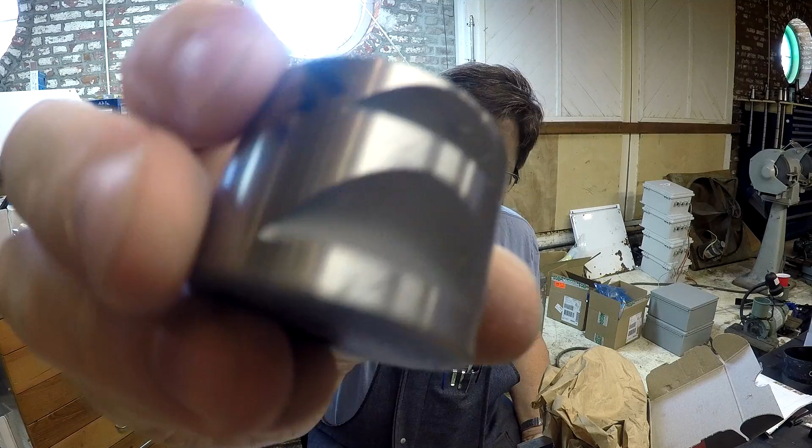If you couldn't tell that by the video, you can certainly tell it by holding an example of his work. He has very nice crisp edges and very nice surface finishes. And then he even sent along the sample piece with the, get zoomed in there. Oh yeah, look at that. And he wrote on here the RPMs and the depth of cuts, so you can use this as a

reference. So I think what I'm going to do is I think I'm going to get my stamping set. I'm going to stamp these numbers in here so that they don't, because they're going to wear off over time. But you want to talk about a nice finish.

So we're going to get to work now on the blocks. Let me change the camera orientation and let us proceed and finish this project up. All right, so here's the drawing of the jaw. Turn it around so you guys can see it. And here you go. Here's the jaw. We've made our nice cut.

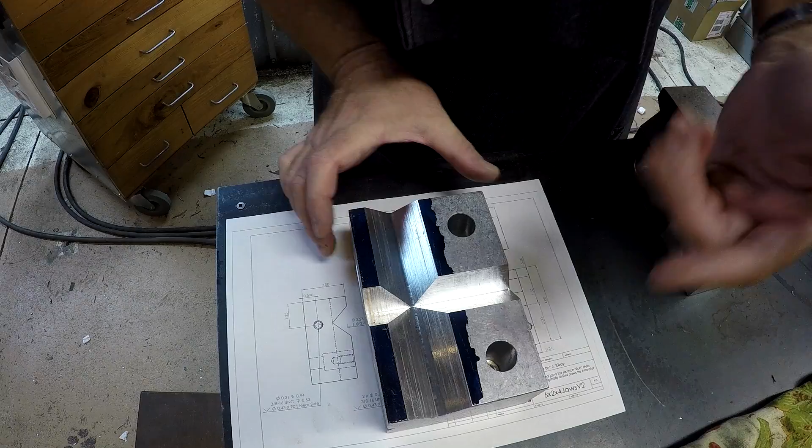Somebody had requested that I get in close so you can see the difference in the surface finish between the horizontal mill cut slot and the shaper cut. As you would expect, it's going to look different because of the difference in the way the tools work. So let's get it in here close and tight. You see the shaper cut slot has these lines in it, but honestly, you can't feel them, right? It's just flat, smooth metal.

This is just because I was manually feeding down. You don't get a real consistent feed when you're manually doing the feed into the work. But it is a nice, smooth finish. And then if you look at the horizontal mill section, you got a very, very nice finish there. And you can see the individual cuts, right, from where the mill was proceeding along.

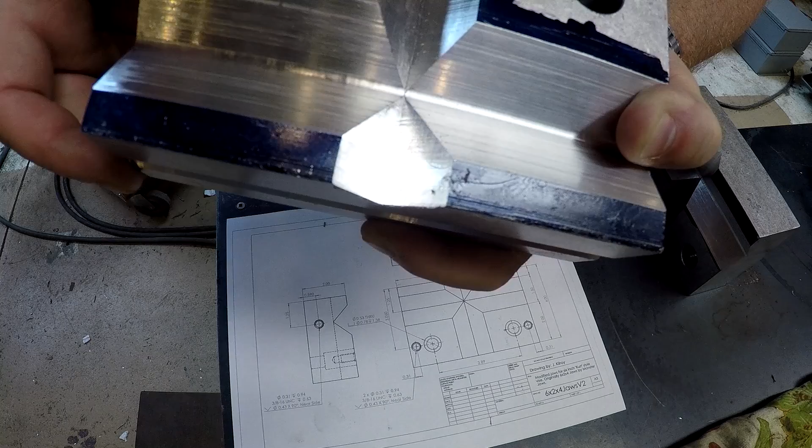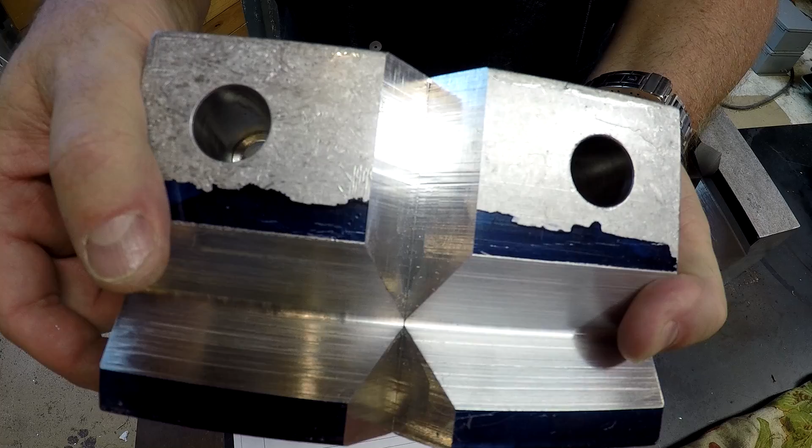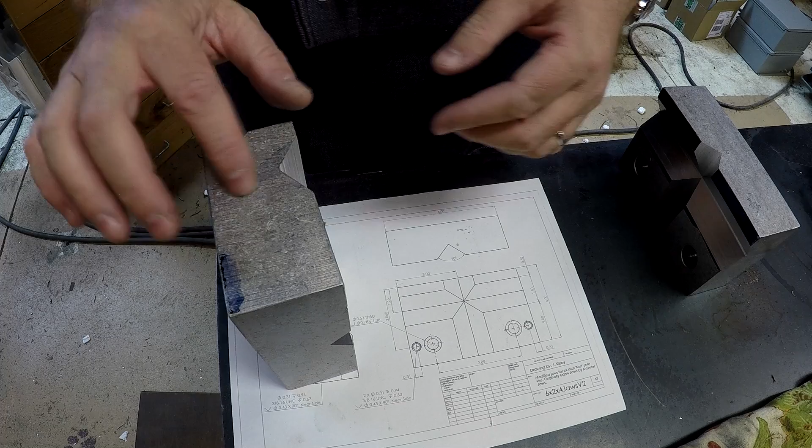There you go. So in both cases, I think we got real good surface finish. That looks really, really nice, so I'm happy with that. What we're going to do now is put the holes in the end here for the stop. This is not what I'm using for the stop, but you get the idea. The Tom Lipton style stop is going to go here. We're going to have to drill and tap a 3/8 by 16 hole here for that.

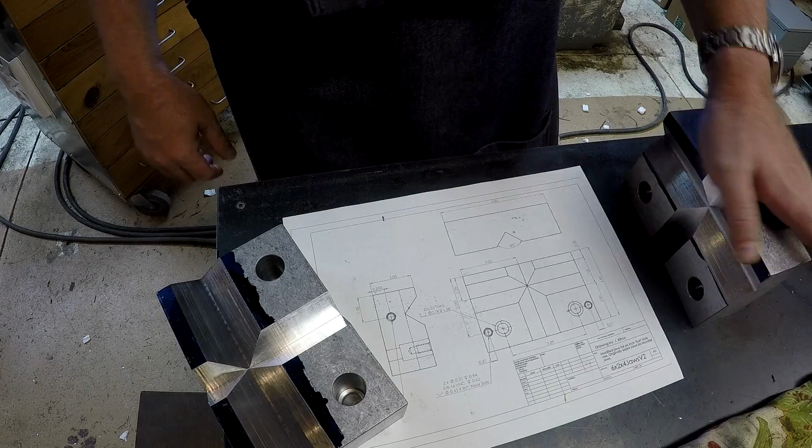And then on the other end, we're going to do the same hole. And then on the front, we're going to have two 3/8 by 16 tapped holes next to the securing bolts that mount this to the vise. These are for what I refer to as the face stops, the use of which has not been divulged yet, but will be shortly. So let's go ahead and get over to the mill. We got two of these. I'm going to do the end stops on both. The face stops are only going to be on one.

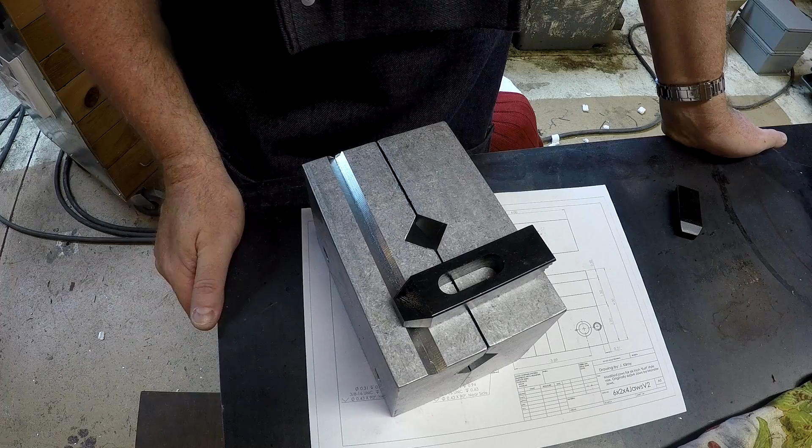And then on this, you remember we added this slot here across the top. I'm going to add some clamp holes here for some hold down hardware. Let me get some of that and show you. So I've got a ton of sets of different types of hold down hardware. And this is the smallest set that I have, and it uses a 5/16 coarse thread, 5/16 hole for the stud.

So since I have a whole set of these step blocks and clamps, I'm going to drill and tap over here so that I can use that 5/16 set to help with work holding, to be able to hold a piece in the top of this small groove. So those holes will go over here. I was thinking I might actually put some right here because I can use a small clamp there, but I can't really set a step block on that. So I think I'll stick with my original plan over here.

So anyway, let's get over to the mill, get this edge, pick our zero up, get this edge, find it in here, and then let's start putting these holes in.

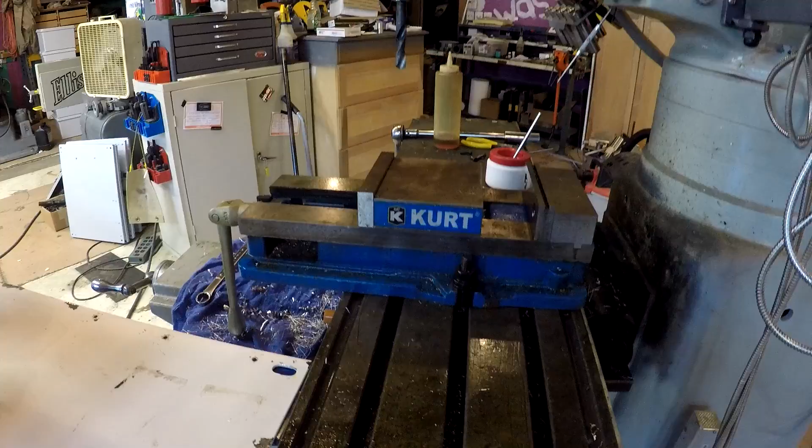All right, before we get started here, I'm getting the mill set up, getting the vise back in position. I'd been using my indexer here, and some people often wonder, how do you handle getting these types of things on and off the mill on a regular basis? And what I have here is a cheap little manual floor jack. It's like a little hand controlled forklift, and it's good for about 300 to 400 pounds.

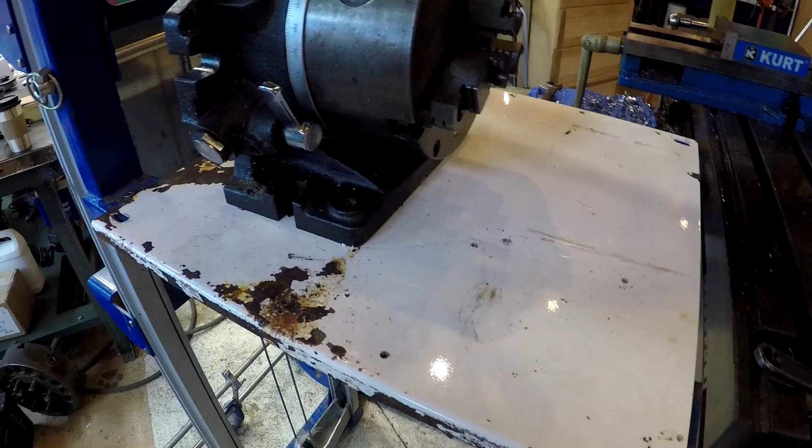And this piece right here is an old beat up back panel out of an electrical enclosure that I had done a while back. Anyway, that's what I do. I pull it up, I get it lined up with the table here, and then I just slide the device over, and there we go. Put it down somewhere where I can get under it with the little forks, and good to go. That allows me to move this kind of heavy stuff around without injuring myself, and do it safely while I'm alone in the shop.

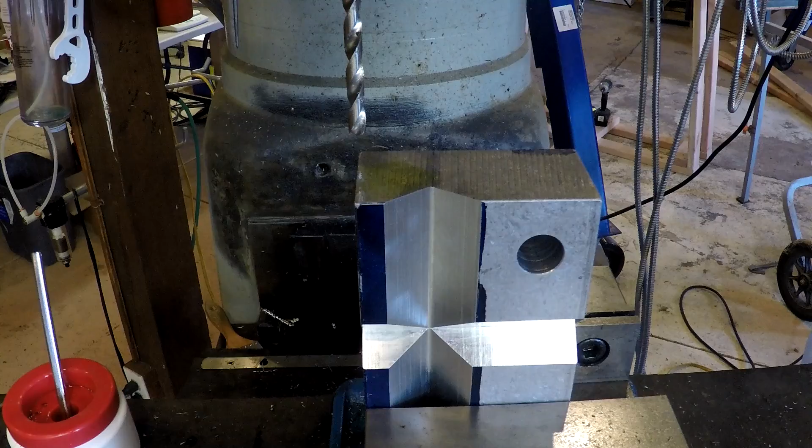All right, here we are in the mill. We've got the jaw chucked up here. I have taken the Ox Tool advice from Tom Lipton, who I understand was shamed into doing this by someone else, and I have this back corner of my fixed jaw right here set as 0, 0 on my absolute. Once the vise is positioned and bolted down to the table, you go ahead and zero that up, and then you can do whatever you want, and you can always get back to that being zero.

So all I did was take a bar here, run it across the 2 vise jaws, and give it a little tap. Tighten it down so that you've got a nice mount right there. So this corner is mounted in relation to that 0, 0 location. So our hole location is 0.590 out and then 1 1/4 down.

So I'm going to change back over to incremental. I'm going to zero my X. I'm going to zero my Y. And then I'm going to go ahead and make my move here. .590, and then 1 1/4 inches. All right, go ahead and snug up an axis or two just to make sure that I don't bump everything.

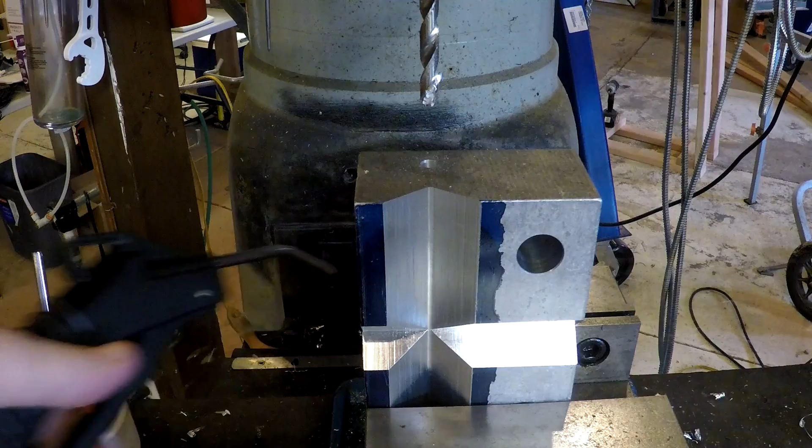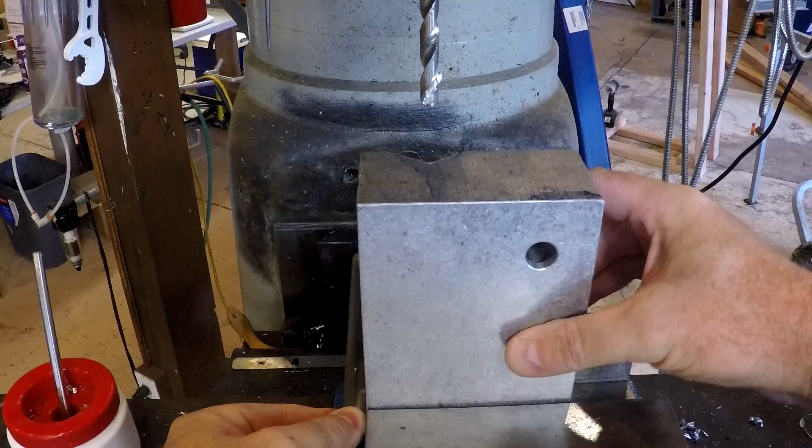Alrighty, when we flip this one over, it's not going to line up any longer, right? I really need to build me one of those little stops for this set of jaws. It's not going to line up with the same location, so we have to offset. So that's easy to do.

So we spaced in 0.590, and what we do is we just subtract 0.590 from 2 inches, which is our total width of part here. That equals 1.41. Undo our lock. So there we are. We're in the same relative position. Now we can drill the other 2 pieces.

Alright, so those are all of our holes drilled for the end blocks, for the end stops. So now we're going to drop in here and we're going to drill the holes in one side for the face stops. And same thing here, we're just going to pick up our end

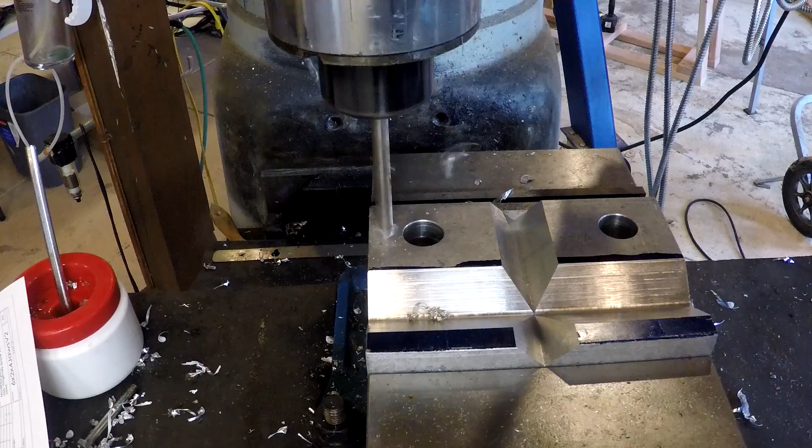So here we are, that puts us right on for this location. So let's keep at it. Alright, so all of our holes are drilled for our end stops on both ends and for our face stops in one block. I'm just going to hand tap these, and I am not going to bore you with that.

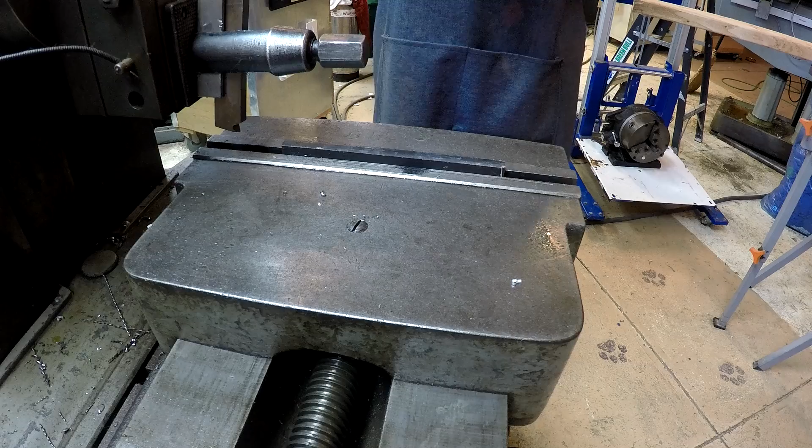Alright, we're back to the shaper. And I've got all those holes in the blocks, the V blocks, hand tapped. I've got to make the straps for the 2 stops. I've got a piece of 1/2 inch bar here that I'm going to clean up the edges. And you're probably asking yourself, why are we at the shaper? You sure like the shaper.

Well, I feel pretty confident in saying that I think there's a real good chance that I'll be the first person on earth to film a metal shaper with a GoPro 4. I mean, I realize that's kind of specific, but still, this is a first. Later after this, I think I'm going to be the first person to film a metal shaper in 4K video. I can't view it, but I can say it was the first, right? So this is kind of fun. I always look for an excuse to use the shaper.

So we're just going to trim this rolled edge off here and give myself a good edge to work off of. And the shaper is real good at that. Got it? Not quite. Let's take one more cut.

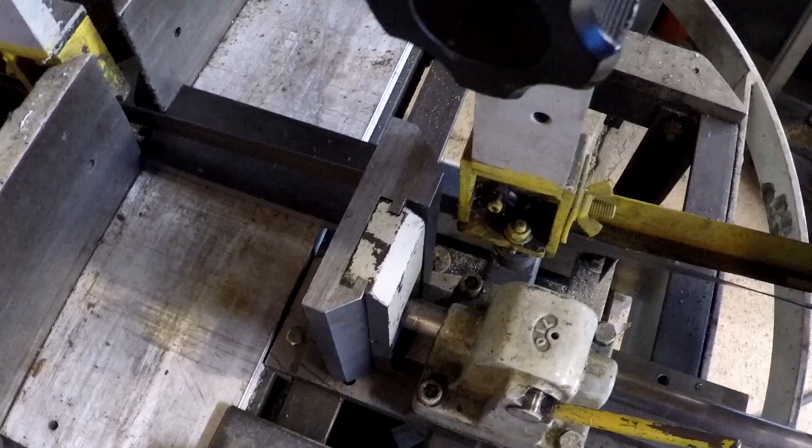All right, we got our piece over in the bandsaw, and you can see my little offset bandsaw vise jaw is paying off because we're able to get in there, hold that part, cut along the long edge, and we're not going to interfere down here. So this is why we made it, and it works just fine.

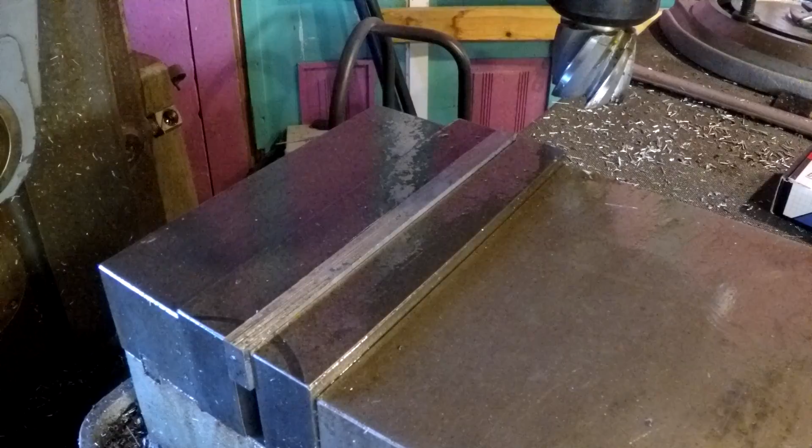Okay, our saw cut edge is not quite perfectly straight, so we're going to go ahead and skim this off real quick, and then we're going to clean up the sides. We're running a 2-inch 6 flute high-speed steel end mill at around 215 RPMs here.

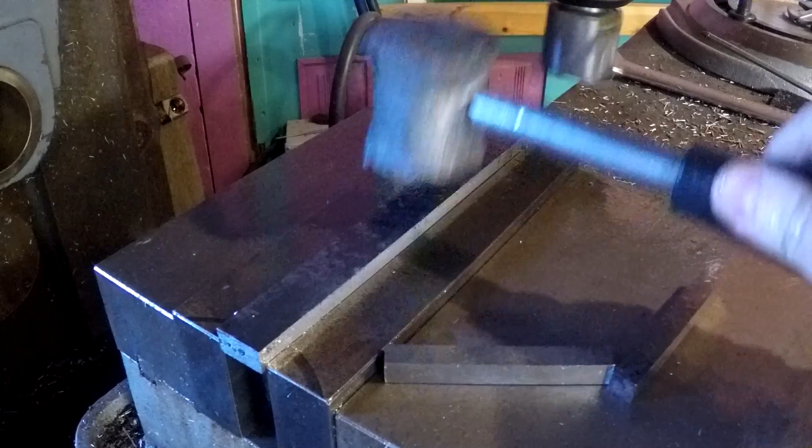Alright, we ought to be nice and close to parallel there, so let's switch this around. Whoop.

Back over at the Herco, we're going to trim both ends, and then we're going to drill the clearance hole and do a little hand work with the file, and then we'll be finished. As far as this goes, dimension wise, I've got on my drawing 2 1/4, but let's say 2 1/4 is a minimum, right?

So I'm gonna finish these up a little long. I can always trim them off later if I need to for some specific need. And this is a 1/2 inch 4 flute solid carbide end mill, and we're gonna trim these up.

Okay, so I went ahead and set a stop. I mounted the piece flush to this end of the jaw, and then set my little stop here to give myself consistent part location. And I got my calculations here. I measured the width of the part and just came back half.

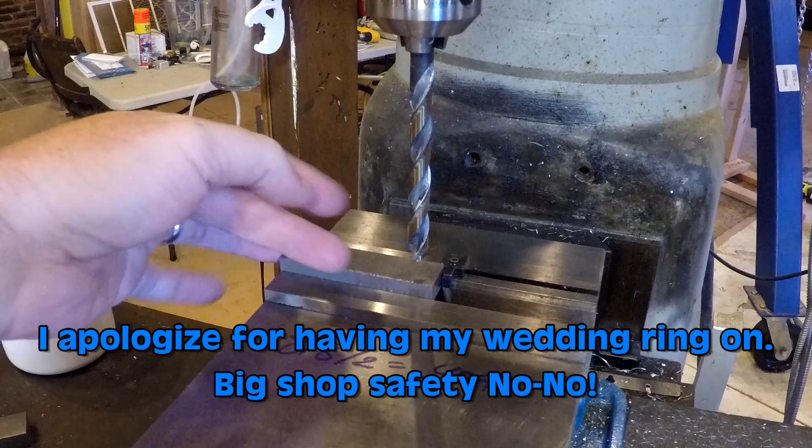And we're drilling the hole 0.409 in and 0.2625 down from this end. And it's a passage hole for a 3/8-16, which is a 25/64 for a close fit. A little of the A-bomb approved go-go juice there.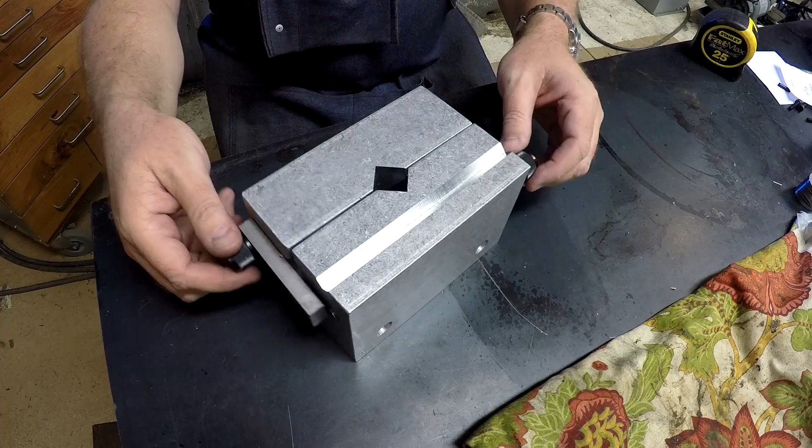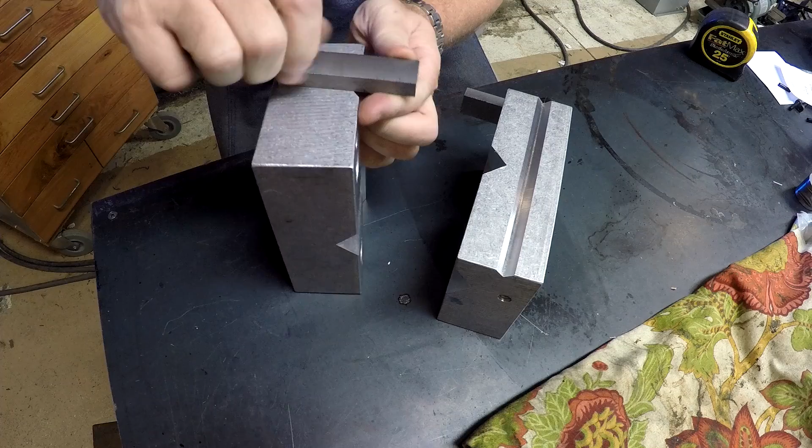Alrighty, so here we are. Our two jaws with the stops installed here. These nice knurled thumb screws are ridiculously cheaply priced from McMaster-Carr. So, I mean, you know, $3 or $4 for that nice hardened steel thumb screw. So there's our blocks ready to go.

Gonna go ahead and call my buddy with the bulldozer and tell him to bring the pins on over so I can knock the rest of that stuff out. And these are gonna really help me do the job. Got another job coming up where I'm gonna use the face stops, and I will demonstrate the use of those at that time. So it's a way to use these for some alternative work holding techniques, both in and out of the milling vise.

So thank you very much for following along with this little project. Again, Monster Jaws, the basis of these, the actual blanks that I used. They don't list this size anymore, and these are from quite a while ago when they were first getting going. So I don't know if they do the 6x4x2s anymore, but obviously the techniques demonstrated are applicable to pretty much any size.

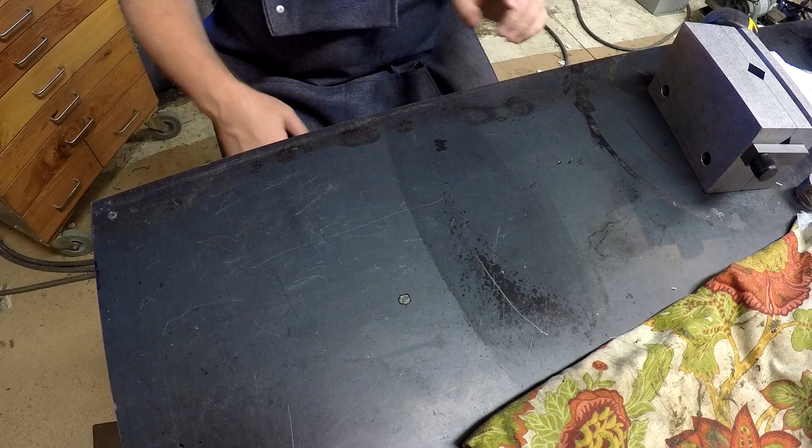Another thing I wanted to show, this is for Randy Richard's benefit. He was showing that test bar that he made for his lathe, and I'm going to show you my kind of slightly unorthodox test bar that I've used and loaned to friends. What this is, is a piece of B7 1-inch threaded rod that has been cut and has nice accurate centers that I turned. I single pointed those centers. I didn't drill those centers. So these are nice accurate centers.

And then I've got two pair of nuts on the threaded rod, and they just hold a washer, right? So that's a single 1-inch regular old flat washer. You mount this thing up in the vise, put a couple wrenches on and really clench down on that washer, and there you go. You've got a test bar that you can cut and that you can measure. You got plenty of width on that face, about 3/16 of an inch to get an indicator on. So these work fine without getting too fancy, and they never wear out.

As soon as these start to get worn, you just take it apart, stick a new one in there, and go on about your business. So this works great. It's a nice length here. Washer to washer is 13 and 5/8 center to center. So this gives you a nice little test. You could move these around if you wanted an exact foot to figure out your taper per foot. Just move these around a little bit, and you can make this test bar as long as you want.